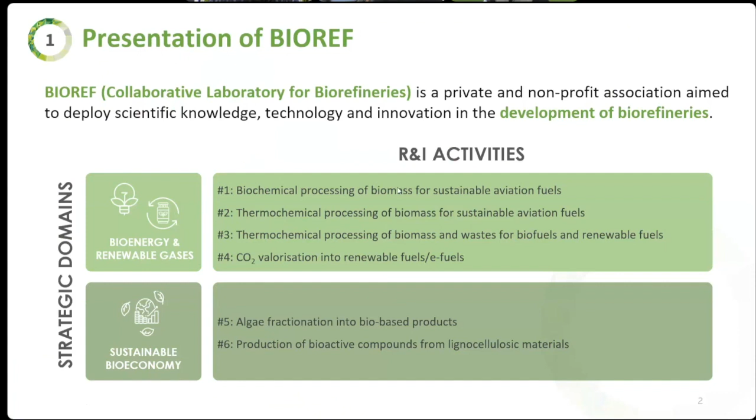Moving forward, we are currently supported by 22 associates from Portugal. Of these, 10 are academic and energy research centers located here in Portugal. There are also another 12 associates from the private sector, with focus areas in different activities, such as waste treatment, production of fuels, transportation, and the development and production of new products originating from biomass.

Now, our services are also diversified. We cover a range of services from consulting work. We also develop state-of-the-art studies. We make market studies for the evaluation of new biorefineries, for example. And we are also interested in the integration and stimulation of new biorefineries by developing new concepts for their construction and development.

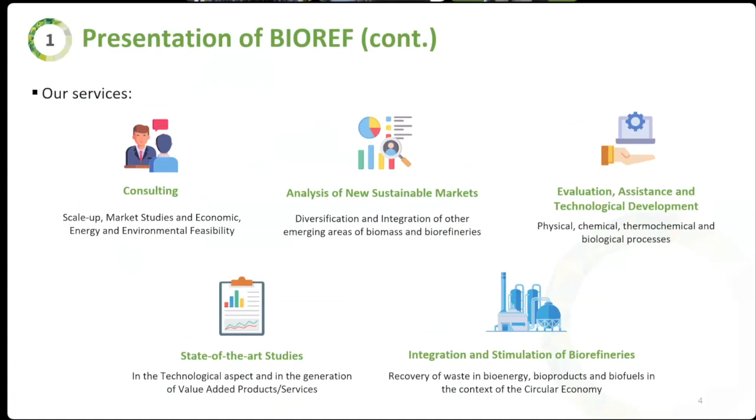So now moving to the core theme of this presentation. First of all, I will define gasification, which is basically a conversion of biomass conducted at high temperatures, around 700 to 1000 degrees Celsius, with the main aim of producing a gas for energy applications.

The difference between gasification and the traditional combustion process is the use of a small amount of oxidant agents. The oxidant agents that we can employ in the process can be air, oxygen, steam, and also CO2. These are the oxidant agents that we commonly find in the literature.

But compared to the combustion process, the amount of oxidant agent is relatively small in order to produce a product gas with some calorific value that we can use for other applications. From this process, we also obtain tars, biochars and ashes as byproducts. These are not very relevant for gasification. The product gas is the more interesting product.

Here we can see some images of the tar, the liquid fraction of gasification, and also the char and ash produced after the process, which are basically the remaining solid particles that we obtain from the process.

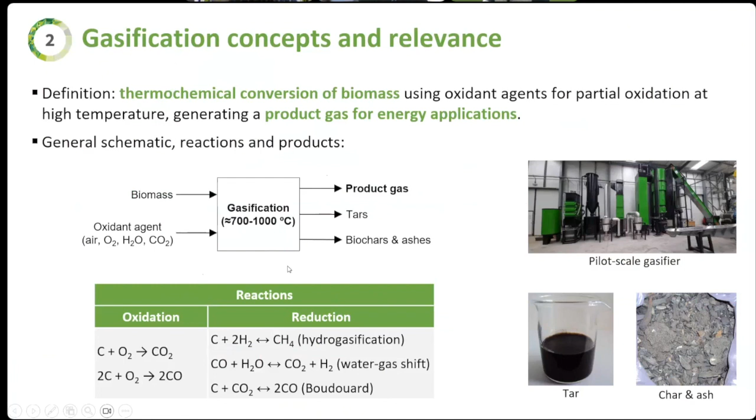So now talking about the products and their applications. Essentially, the product gas is very rich in carbon monoxide and hydrogen, which provide a significant lower heating value for the gas.

The main applications of this product gas can be the generation of energy, both thermal and electric, and also the production of new renewable fuels, such as gases like biomethane and hydrogen, and other liquid products covering a diversified range of fuels, such as methanol, ethanol, dimethyl ether, and also the Fischer-Tropsch process to produce diesel and gasoline.

Each of these products that we can obtain from gasification requires different proportions of CO and hydrogen, and the catalysts used in the synthesis of these fuels are also different. These are the differences between the production processes of all these fuels.

Biochar produced as a byproduct, because it has high carbon and ash contents, can eventually be used for the production of new catalysts and construction materials. We can see some literature that validates this application for biochars.

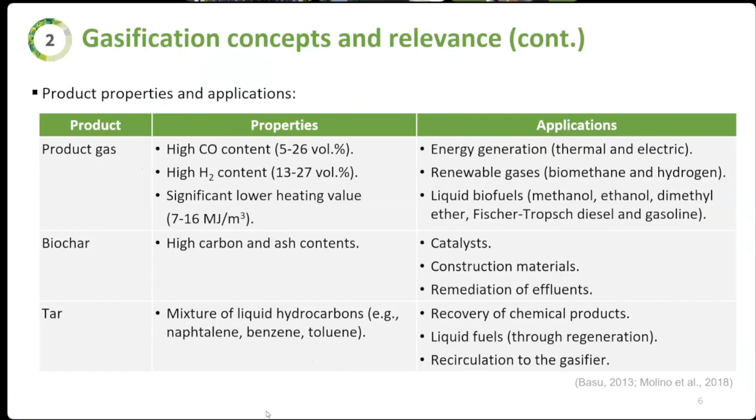After this table, okay, we can see some reactor configurations that are commonly used in gasification. Sorry.

So basically, we have two versions of the fixed bed reactors. In this case, the feedstock is introduced from the top of the gasifier and moves downwards through the reactor. So the fixed bed version covers two types, in this case downdraft and updraft. The difference between them is the orientation of both the oxidant agent and the feedstock.

In the case of the downdraft version, we can see that in this lower zone of the gasifier, both air and feedstock circulate in the same direction, and the product gas is obtained from the bottom. While in the case of the updraft gasifier, we can see that both the feedstock and the oxidant agent, in this case air, circulate in opposite directions. So this has implications in the process and also in the products that are obtained.

In the case of the downdraft version, some of the advantages associated with the process are the production of low tar amounts, an undesirable product, and also it can be implemented at small scale, which is very useful for the production of energy, for example, in very remote areas and in agriculture applications. However, the feedstocks must be prepared with some demanding requirements, such as the granulometry, and also they must be very well dried. In the case of the updraft gasifier, the production of tar is somewhat higher, but as an advantage, the process can admit wetter feedstocks in the reactor.

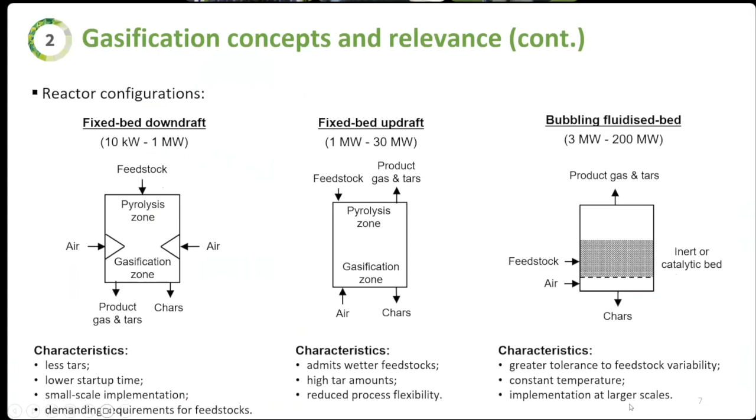We also have two other reactor configurations, the entrained flow, for instance, which admits both biomass and the oxidant agent. In this case, the biomass is very well granulated in the same channel that is introduced inside the reactor. The granulated biomass is composed of fine grains in the order of 250 to 1000 micrometers, so very fine, in order to be very well mixed with the oxidant agent. But the process implies the use of higher temperatures and pressures when compared with traditional versions of gasifiers. The temperature can reach 1500 degrees Celsius, and the pressure can be up to about 70 bar.

So in this case, the product gas is very clean and very energetic with minimal tar production. The process also has high feedstock conversion rates because of the granulated form of the biomass, but requires very fine grains, or requires a pretreatment of the biomass in order to achieve the quality of the product gas that we can reach with this process. There is also the dual fluidized bed version.

In this case, we have two reactors, the combustor and the gasifier. The gasifier operates in the traditional way. Here we mostly use steam; it is the most used oxidant agent in this version of gasifier. But we have a bed material that is being recirculated between the gasifier and the combustor. Typically, this bed material can be calcium oxide, for instance, that captures the char and CO2 from the gasifier and moves them to the combustor, where they can be released again to produce the flue gas, mainly composed of CO2, and also the char that is deposited inside the combustor.

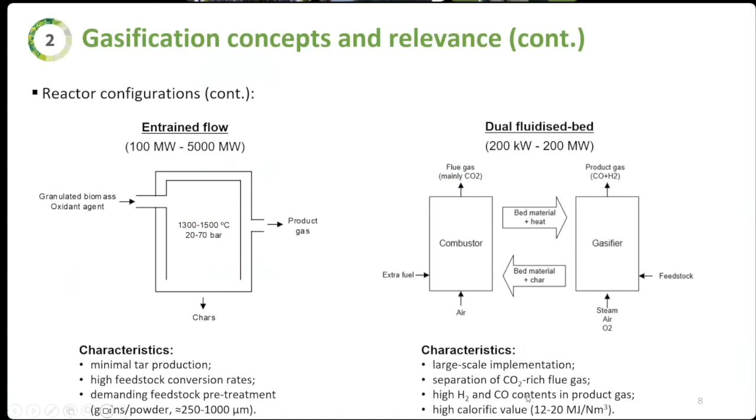Now, this table presents a summary of the syngas composition obtained from the different reactors: fluidized bed, updraft, downdraft, dual fluidized bed, and entrained flow. The most important conclusion we can obtain from this table is perhaps the effect of the oxidant agent on the composition of the syngas. We can see that when we use oxygen or steam as oxidant agents, we can increase the proportion of hydrogen that is generated from the different reactors.

And this is very useful for the production of new synthetic fuels because we can reach better proportions between hydrogen and carbon monoxide that are required for the production of new fuels in further processes that follow the gasification process.

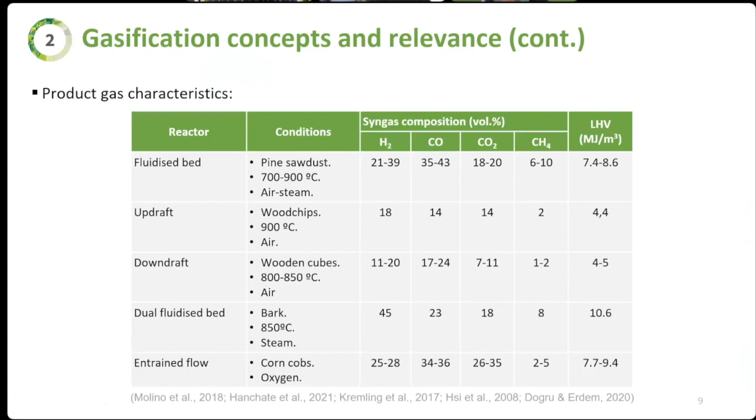Now, comparing the advantages and disadvantages of gasification with combustion, we can see that the emission of pollutants such as nitrogen and sulfur compounds is reduced in the case of gasification because we are injecting less oxidant agent. Also, we can implement gasification at smaller scales with high energy conversion because we are using the syngas to produce heat instead of a solid product that is typically used in combustion. So combustion of syngas is somewhat efficient in this case.

And there is also good flexibility for producing new products, energy and fuels when using gasification, while in the case of combustion, we only obtain flue gas and thermal energy. Gasification can also be autothermal if the proportion of oxidant agent is correct. This must be very well controlled.

Now, some of the disadvantages are related to the requirements for pre-treatment of feedstocks, which are somewhat demanding when compared to combustion. Also, gasification presents a lower technology maturity. Combustion is very widespread around the world and very well known. There is also a need to inject the oxidant agent in very precise amounts in order to obtain a good composition for the syngas. There is some instability of temperature, and the process can be somewhat less silent and odorless when compared to combustion.

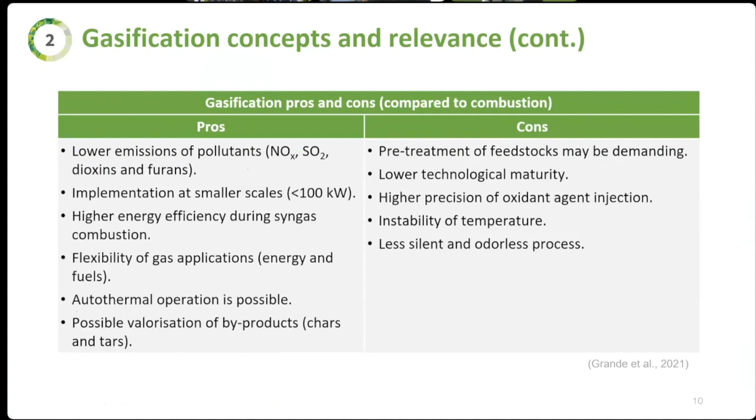Another issue that we can find in the product gas is the presence of lots of contaminants that, when contained in high proportions, can cause different problems in downstream equipment, such as catalyst poisoning when we are trying to synthesize new fuels with the syngas. Corrosion issues can also occur, formation of deposits, and air pollution can also be associated with these contaminants. Although they are present in low amounts, even these low amounts can produce significant problems in downstream equipment. And this is why we need to perform a gas cleanup step after the product gas is obtained from the gasifier.

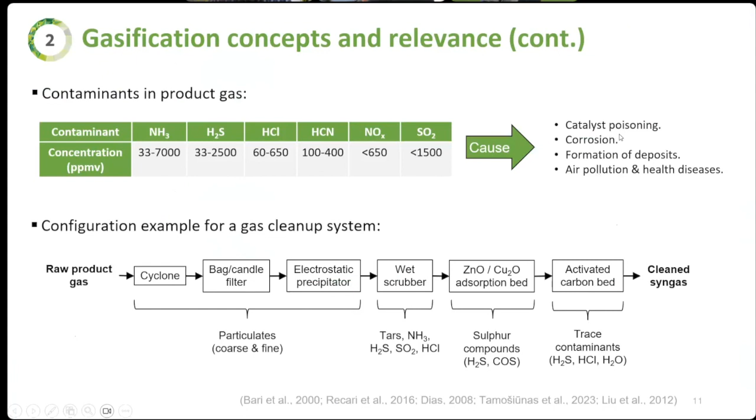Now, moving to the case study that we are about to present, we can mention the project HyFuelUp, currently being developed over a period of about 4 years, 2022 to 2026. The project is mainly devoted to converting low-grade feedstocks into biomethane by using dual fluidized bed gasification associated with other processes, in this case electrolysis and methanation, with a TRL level around 6 to 7. So basically, it's a demonstrator that is being developed and funded by the Horizon Europe program.

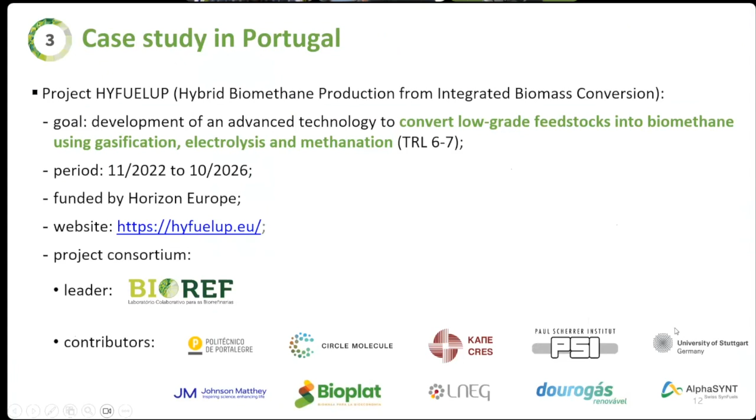In this case, the consortium is composed of BioRef, leading the project, with the contribution of 10 other partners, Portuguese, Swiss, and also from the United Kingdom, Spain, and Germany. These partners will provide the technical support required for the development of this project.

We also have to mention some of the innovations associated with the project HyFuelUp. First of all, the use of different feedstocks: in this case, low-grade wastes composed of digestate from sewage sludge, and also different lignocellulosic materials obtained from crop rotation systems that we intend to analyze and study in the project. We have a hybrid operation of the gasifier between SEG and OxySEG. SEG is an acronym for sorption enhanced gasification, a variant of a dual fluidized bed gasifier that we will see later. We use the same reactor configuration to promote the hybrid operation of the process.

We also have a flexible addition of hydrogen produced by electrolysis, which is required for the methanation stage to produce the biomethane. And with all of these innovations, we expect to enhance the carbon conversion efficiency and also reduce the production of greenhouse gases when compared to traditional processes.

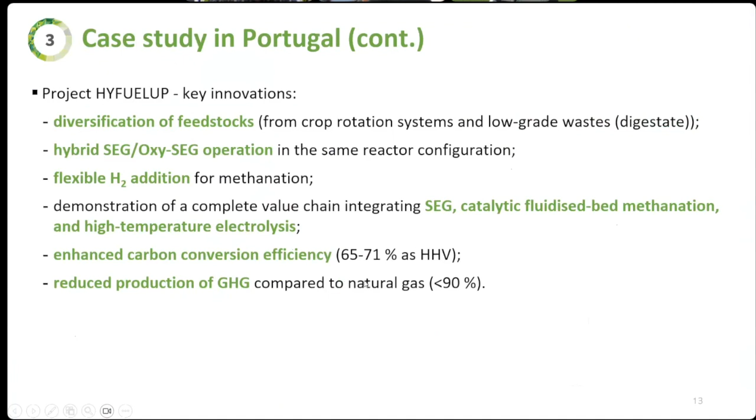The project is intended to be installed in a city in the center of Portugal, in this case Tondela, and it is also the intention to perform a retrofit of an existing circulating fluidized bed gasifier inside this site. So the current plant that is installed in Tondela has this aspect with the circulating fluidized bed installed before, and we intend to improve this gasifier to the dual fluidized bed version to convert it for biomethane production.

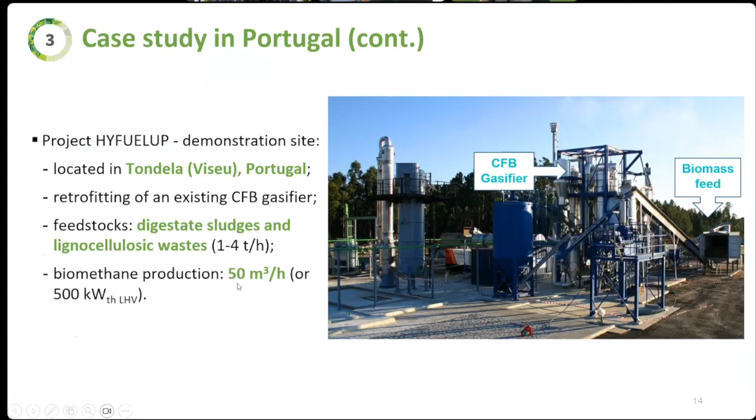As already referred, the feedstocks used in this case are digestate sludges and also different lignocellulosic crops with an injection of up to 4 tons per hour, and the biomethane production is expected to reach 50 cubic meters per hour of gas.

Here we can see a simplified scheme of the operation of the HyFuelUp project. In this case, we have a dual fluidized bed version composed of the gasifier and the combustor, admitting biomass and steam in the gasifier and different oxidant agents inside the combustor. We also use calcium oxide between the gasifier and combustor for the carrying of CO2.

So in normal use, the CaO goes from the combustor to the gasifier, and then in the gasifier, when the CaO captures the CO2, it is transformed into CaCO3 to move back to the combustor to release the CO2 for other processes.

We also can see a step composed of a gas cleaning stage both for the product gas and flue gas produced in the gasifier and the combustor, and the fluidized bed methanation that uses the hydrogen-rich syngas and CO2 to convert both gases into biomethane. Then the gases are purified and transformed into liquid biomethane mainly for the transportation sector.

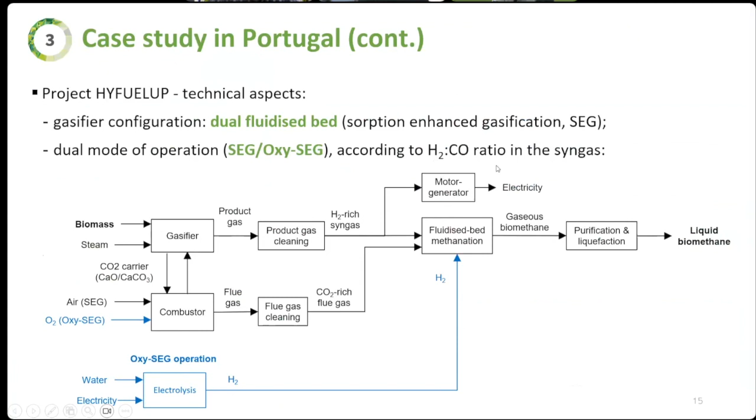And also in the oxy-SEG operation, we can use the electrolysis module that enhances the production of hydrogen required for the methanation process. And therefore, we can reach the conditions that are required for the methanation to conduct the production of biomethane by using appropriate hydrogen to CO ratios inside the syngas.

Now, finally, we can mention some highlights of this work by reinforcing that gasification in most cases can be considered a sustainable and very flexible process to produce different products from biomass. Because of this proven sustainability, European environmental policies are suitable for the gasification process, and therefore gasification can be very interesting to reach the goals established by the European Union regarding the production of renewable fuels and reduction of greenhouse gases.

We also saw that the injection of both steam or oxygen can enhance the syngas composition by increasing the hydrogen and CO amounts. However, the production of both steam and oxygen involves other complexities and high costs when compared with the use of common air in the process. We also can reinforce that the gas cleanup step is very critical in the process, which requires very thorough planning at affordable cost for the appropriate cleaning of the product gas.